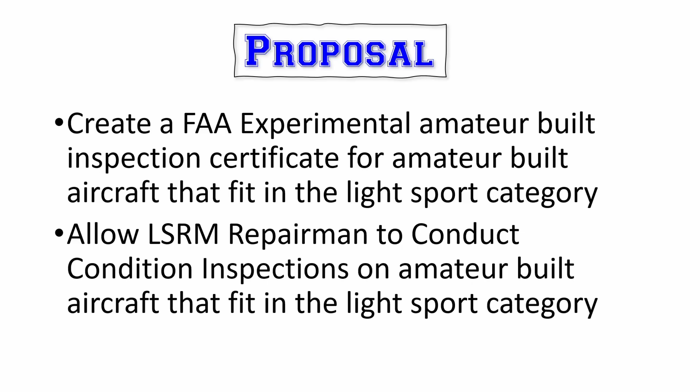We're just suggesting that the people that have a light sport aircraft that fits the original definition of light sport can take a 2-day course. So the people that have a light sport aircraft could take a 2-day course and get a certificate to do their own inspection, and we're proposing that the amateur-built aircraft owners be able to do the same thing.

Because especially if it fits into the definition of the light sport, I'll have a person call me and they'll say, you know what, I have a GT 500 and I want to take that class - can I take your 2-day class and do your inspection? And I have to say, I don't know, I will actually have to look up the N number. Same make, model, could be built in the same year, and one person can take the class and one cannot.

No difference. And I've always thought it would be nice, and I think we should allow a person who has an amateur-built plane to take that 2-day inspection course. We think that if we're allowed to do this, we're going to have a significant impact on safety. We're going to increase the number of affordable aircraft that can be flown, because right now it's too hard to find somebody to do the annual inspection, so owners have kind of given up. And all the cost burdens on the owners, we're going to be able to reduce some of that.

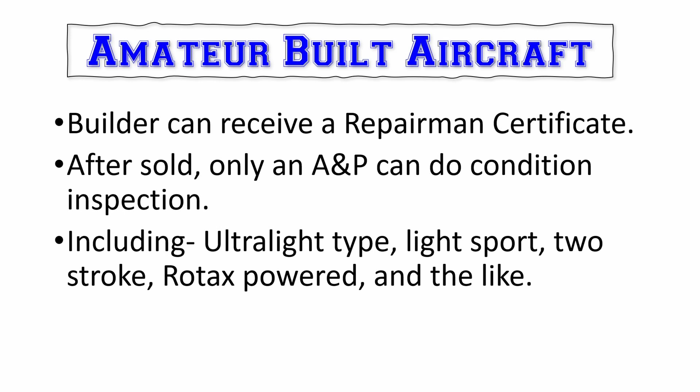Right now, if you own an amateur-built airplane and you're not the builder, what are your options? If you're not the builder, you're going to have to get an A&P. The original builder can get a repairman certificate to do the inspection, but very rarely will they follow the plane and do that inspection for the second owner. So what's the second owner got for options? An A&P, that's it, there isn't any other option. The original builder can file based on the build to get a repairman certificate, but there's only one repairman certificate for the life of the plane.

I bought a little Quicksilver GT400 with a Rotax 503 two-stroke. It's certified as an experimental amateur-built, and now I'm going to go try and find an A&P that has any two-stroke Rotax experience, or that's willing to look at it, or interested, because it's not their world.

That's exactly right. Over the years I've had a lot of customers that wanted me to work on their amateur-built airplanes and do the condition inspection on those airplanes. We've got a long history with EAA - we were founders of Chapter 1148 in Corning, California. I've been a tech counselor and flight advisor for 20 plus years, built 36 airplanes now, and had lots of customers that I did condition inspections for.

But it's kind of interesting because what happened to our insurance rates when we said we wanted to do condition inspections on experimentals? It went up. We had to pay more if we were going to do experimental inspections and not just standard category inspections. But here was always my issue: who can work on an experimental airplane?

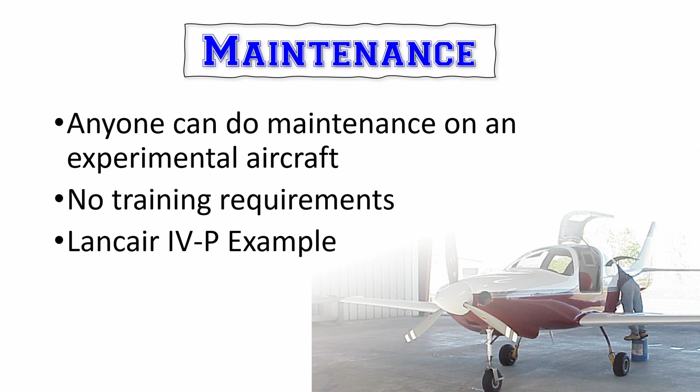Oh yeah, well anybody can do the repairs, the maintenance, the service, the modifications on an experimental aircraft. Anyone watching this video, and your grandmother, could do it because there are no regulations. So I've got on the screen a picture of one of the Lancairs - I built 3 Lancair 4Ps now. One of these airplanes right here has a TSIO 550 B1B twin-turbo intercooled 350 horsepower fire-breathing engine in the front.

Everybody watching this video right now, 100% of you are legal to go out to that airplane on the ramp, pull the engine out, put it on the workbench, tear it down, do a complete overhaul, bolt it back into the airplane, get the logbook out and sign off that you've done that, write out an invoice and charge for your services. Every single person watching this video can do that right now. Now that is pretty amazing what we can do with an experimental amateur-built airplane.

But all we're proposing here is that same group of people that can do all of that kind of stuff - why don't we want them to be able to do their own annual condition inspection on those airplanes?

The issue I've always had is if I've got somebody I don't know and he wants to bring his airplane in so I can do the annual inspection, I know that him and all his dipstick buddies have been working on that thing, and they want me now to be part of the liability of signing off that airplane. The minute it leaves the shop, even if I've got it running perfect, they're going to start dinking with the thing, and now I have to be in the mix for liability with that airplane forever and ever, and I don't want to do that.

So the customers that I had that I was signing off amateur built condition inspections for, we have to become a team. We decide that if we're going to do this, I'm carrying on some of this liability, and I'm going to try and keep you alive, and you want me to try and keep you alive, so we got to work together on this. The rules are, if you're going to bring it into our shop and have me signing off the annual every single year, saying this airplane is in condition for safe operation, I don't want you dinking with the airplane in between. If you're going to do anything, you come down, we talk about it, and we work together, and I make sure whatever you're doing on that airplane meets my approval, because you're asking me to take all the responsibility at the end of the year.

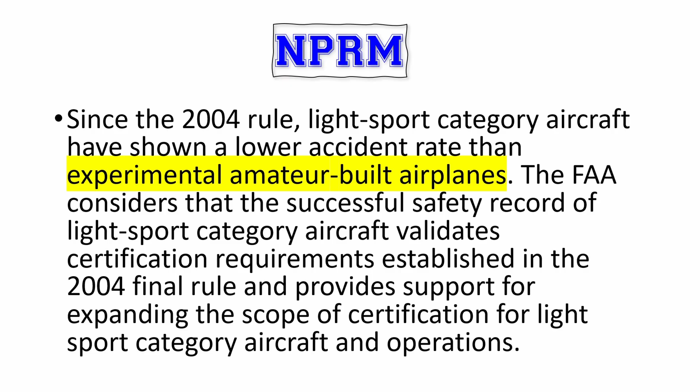And so all of this stuff where you've got the amateur built airplanes and the safety record that the FAA keeps talking about in the NPRM, it's kind of interesting because they keep referring back to the same thing - that the whole reason the ELSA thing is being expanded is that it was pretty successful and our accident rates are lower. Sure, and they're saying lower than the experimental amateur built aircraft, and that's what we're trying to address here - let's get those amateur built accidents low as well. I don't think we need to have that deficiency in the amateur built aircraft.

Now, granted, the airplanes are not built to an ASTM standard, and a lot of them are different than what we'd have in an ASTM category. Many of them are way better than a lot of the ASTM ones - there's some real good builders. Some of them are a mirror image of an ELSA. Absolutely. And so I've always long thought that the owner of an amateur-built aircraft should be able to take the 2-day inspection course and get the certificate to do the inspection on his own amateur-built aircraft, if it fits the light sport category. Yeah, and so nobody's more suited to do this than the owner.

Many of the amateur-built airplanes are just outside of the expertise of whatever A&P they have access to, and there's not enough A&Ps to go around right now. How often do we get guys calling wanting us to do stuff? It's every single day, and we're too busy to do that. Honestly, I don't want to tie myself up with that—I've got other stuff to be doing. So this puts the responsibility for both the maintenance and the inspection right where it belongs, on the guy that's signing these things off. I think it's awesome.

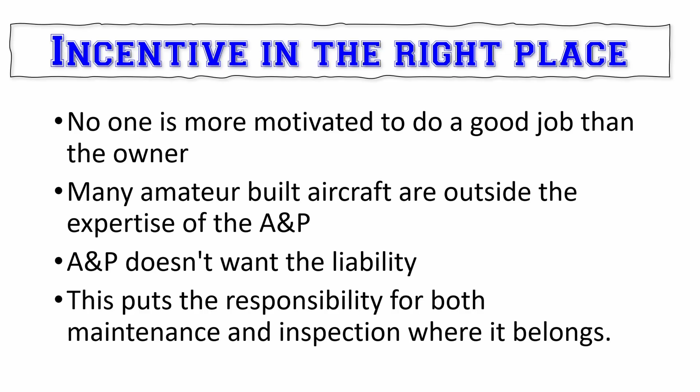Yeah, I think we covered that. And we covered that. So did we cover this also? Yeah, you've been really ranting. That's what I'm all for. I don't know why you have to say stuff like that. I'm just saying that you covered it all.

So we've got a proposal—you want to talk about what we're talking about? We actually have a different proposal. I'd like to see the guys that have an amateur-built plane that fits the definition of light sport take the 2-day inspection course. Many times they're a mirror image. I just had a call from a gal today who has a RANS S7—it's no different than ours that was experimental light sport. This one happens to be amateur-built. If somebody had checked a different box, she could take this class and be able to do her inspection.

So I think the 2-day course—ours was brought in during the transition period, and hers was built after the fact, so she didn't have any choices at that point. That's where the difference is. So you're proposing that if it fits the definition of the light sport rule, they just take the same class that the existing ELSA guys are taking, and get a certificate to work on those. I think that just makes sense. If it were a larger, more complex plane—the expanded aircraft they're allowing through MOSAIC—then I appreciate your plan for that.

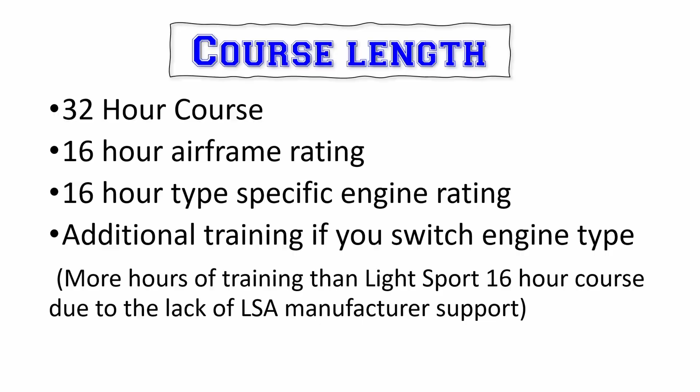But they're true amateur-built—it's not like you could get an RV-12 where there's no difference between the two. I'm on board, I got you. But then I'm also proposing they get a 16-hour airframe rating and a 16-hour engine rating, kind of like an A&P airframe and powerplant rating, but at a lower level. The reason I wanted to do that was so we'd have an engine-type-specific class—if you had a two-stroke engine, you get 2 solid days training on two-stroke engines. We could make a huge impact on the safety of those things. The same person could come back and take a 16-hour four-stroke course, and then you'd have both ratings. Maybe you'd do the 4 days back to back.

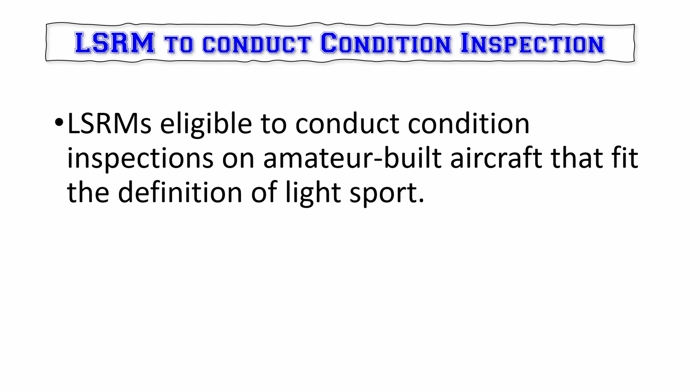And we think if they're fitting into this category of ELSA, why don't we let our LSRMs, who are kind of trained to do this stuff specifically, also be able to do it? I've long thought that they should, and they've always asked why they couldn't.

It just doesn't make sense to them. They'll be in a hangar, and their neighbors have identical aircraft. One happens to be certified light sport, the other amateur built, and they can take care of one but not the other. And it's very frustrating even for the customers.

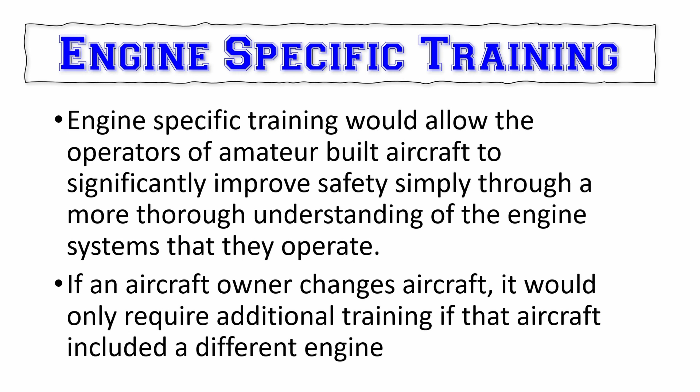They're being trained very specific on these types of airplanes we're talking about. We're not asking them to work on type certificated airplanes or stuff like that. So my engine specific training would be specific to each of those engines on that airplane, and they would get almost like a type rating for that engine.

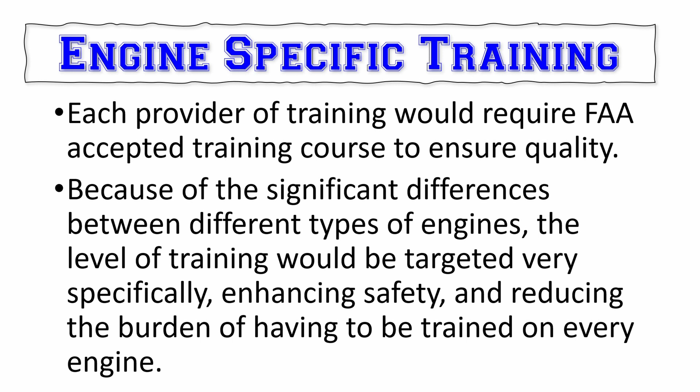And then if they buy a different airplane with the same engine, they don't need another class. But if they go from, say, a Continental to a Rotax 912 IS or something more complex, then they'd need an additional rating. This would all be FAA approved courses, so it would still have that onerous responsibility of making sure it meets the minimum requirements.

So my argument is that the 2-day course is a license to learn. Our guys go out right now and take maybe the Rotax courses. Even though we teach quite a bit of the Rotax information in the class, they'll still go out and take additional training. So for me, it's a license to learn. We give them the minimum, and then they can always do more, and they usually do, because they want the information.

They'll go to a Jabiru class. I'm willing to recommend a little additional training. If you gave me the choice of your program and the FAA saying no, or my program and them saying yes, which would you take?

Well, that's not my only choice. If they said yes to me, I would take mine. We have to trust people. I'm always into less government control, less government regulation, and let's trust people to. I agree, and many of them do go out and take additional training.

But here's my proposal. One of the reasons for the specific training is it would do something the one-off weirdo engines out there wouldn't let you do. You'd still be stuck under your same program. But if you're doing one of those airplanes with a one-off engine, you probably get a repairman certificate anyway, because you're the one that built it. So that's not a big burden on them.

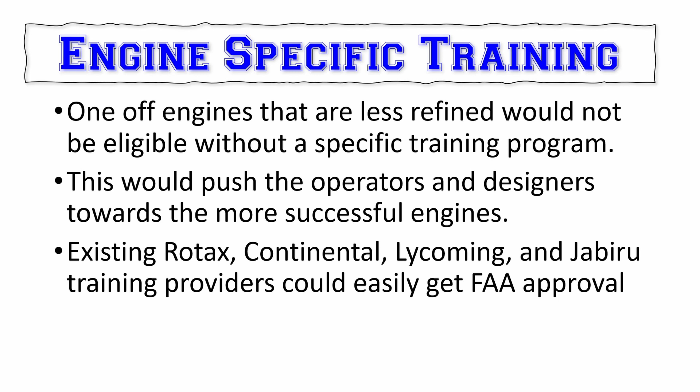It would also push the manufacturers of engines and airplanes to use more of the traditional engines that have really high reliability—the Rotax, Continental, Lycoming, Jabiru group—and it would push more of them that way.

And we already have every single one of these. Lockwood, Ronnie Smith, and Morris down there are doing training all the time on these Rotax engines. It'd probably be just a little bit of work for them to get FAA approval for those specific courses. Continental and Lycoming already have training programs, Jabiru already has a training program. All of those providers could now be part of that solution of getting more training out there.

I think if you asked anyone with an amateur built airplane whether he was willing to put in the time for these 4 days of class, or still have to take it to an A&P, I think hands down they would run to that. Sure, I'm sure they would, for 4 days worth of training.

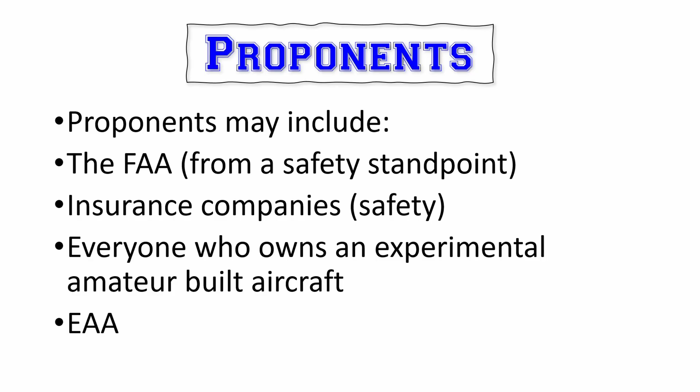I'm just trying to solve that problem, and we're talking about solving a whole bunch of these problems. We're talking about putting the incentive in the right spot. We're controlling the costs—the costs are getting out of control. These $300,000 airplanes are ridiculous.

And the amateur built groups—the whole reason behind the EAA and this amateur built airplane movement, right from the very beginning when Paul set this thing up—was that we need to be able to get some innovation and some control in these things and be able to build them ourselves. And that was kind of the whole point.

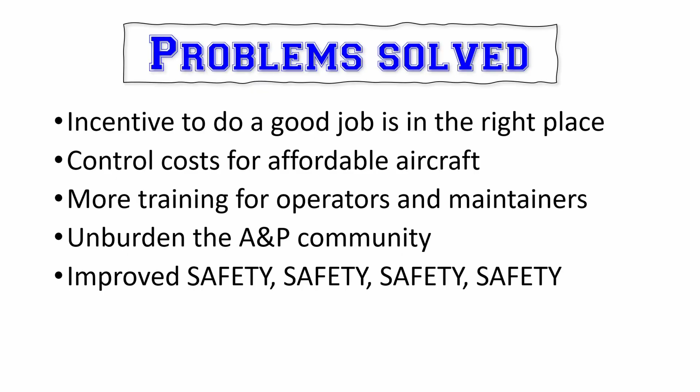And we don't want to go to, you just have to go buy something built by a manufacturer or you can't fly. That doesn't make any sense to me. And more training for the operators, the maintainers, the owners, that always ends up being good. And then it unburdens the A&P community, they'll stop calling and asking if they can get us to do something for them. And of course, safety, safety, safety, safety, that would certainly improve. I think it kind of seems like a no-brainer to me.

Yeah, I think it's an exciting idea. I hope that we can get something in one proposal or the other to relieve this frustration for the amateur built pilots who can't find anyone to do their annuals, or just want the right to do it themselves. Just like our other customers, they do a better job because they're more interested in taking their time and doing it right. I know there's a huge need out there for sure.

Yeah, I think it just makes total sense. We're not going to go through all the instructions for commenting like we did on the first video, there's no sense covering all that again, but we do want to mention that if we're going to make any impact at all, we've got to approach this from a really rational standpoint, not just 'we want it,' but explain why it makes sense.

The FAA is always great to work with. Every group of FAA inspectors we've worked with, their goal is always to try and make things safer, and if you can show some direction to make this thing safer, they'll bend over backwards to help. I think this is right in line with that. I can't imagine them not being receptive to the whole concept.

Yeah, we're just going to hope, and then comment, because it's a draft and our comments can help change it. We have a big mailing list, but it's almost all of our 2-day guys who've taken the 2-day class, the ELSA guys, and the SLSA guys. I think we'll hit some amateur built people, but we certainly can use some help with that.